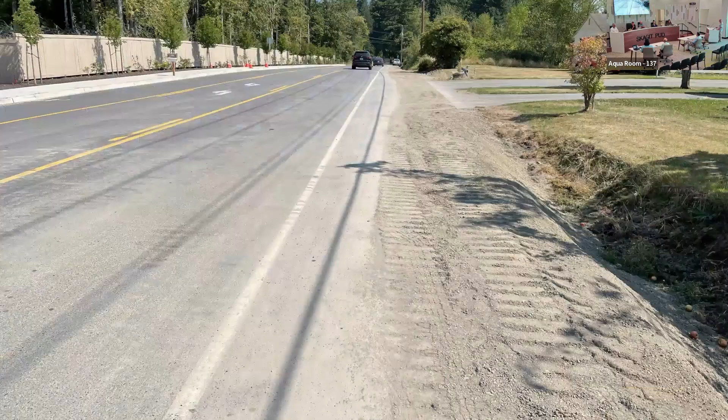So College Way, what's happening? College Way. We've had some challenges with the thickness of the pavement. It was a foot thick or more. We had some utilities in the ground. There was old wood stave pipe, traffic. The contractor really did a good job with that one and wrapped it up just about a month ago.

The Township Road project, this is a crew project. The street is paved, so it was great that we were able to get that in before the city of Sedro-Woolley did their work. The East Division Street project, this is something the crews are working on now. It goes from where we left off our improvements on Mountain View Road to just past the school. That would be from east to west, essentially.

It replaces some old 4-inch AC. There's some restrictions in there. It's really a 12-inch line out on Mountain View Road, and then we have this 4-inch restriction. So we're taking that out. We're renewing the pipe, and we're making the fire flow viable all the way out to the end of the line. And then our last contracted project, again, which we're seeking award for, is the Alta Vista project, and that will round out our...

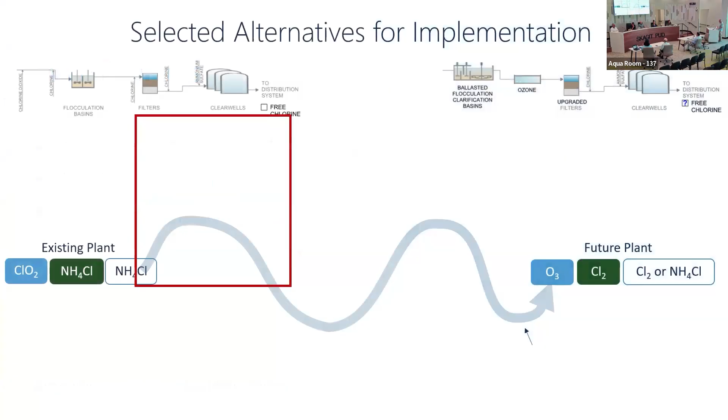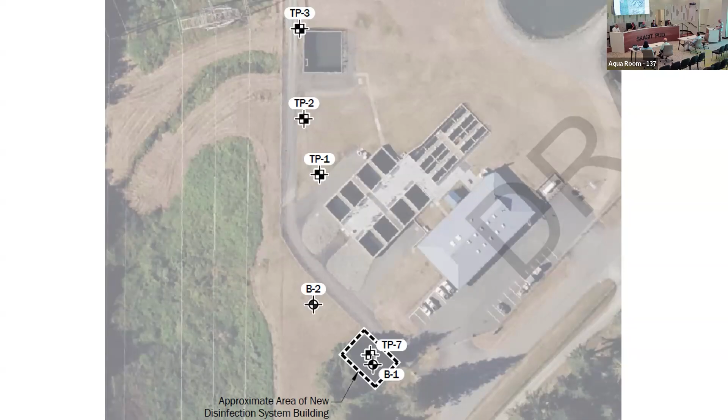Next up, we'll talk about water treatment plant projects. This first water treatment plant project is the disinfection replacement. We went through the alternative analysis earlier. I'm just clicking through this slide. But now we're in the design phase. We've taken some of the concepts that were in the alternative analysis and we're refining them, trying to bring the scope down. We've combined some of the rooms to make the footprint smaller and reduce the size and the cost of the building. And we've also relocated the building to a little bit better spot that's just left of the gate as you enter. This will make delivery of chemicals easier, and it won't have as much impact on future things we want to do up at the water treatment plant.

The W1 pump system, this has been under contract for a while. The contractor's been securing materials. They anticipate starting September 9th on that one. Let's see, the generator project, we're still at 100% design. We just haven't quite pulled the trigger on going out to bid. We do expect to do that by the end of the year. Just with other things going on, it's a lot of additional work to get that out the door. But we do anticipate getting that out by the end of the year.

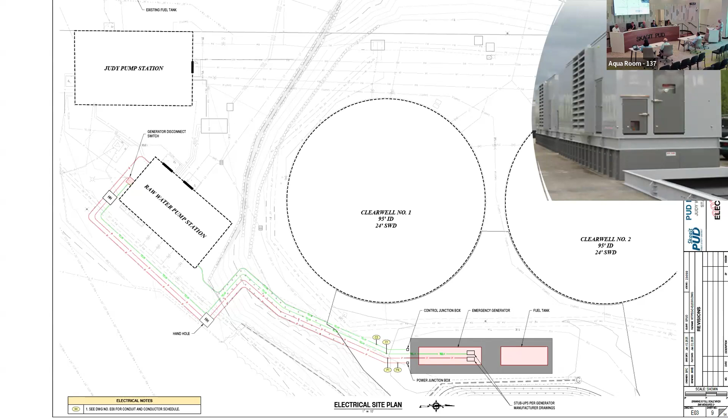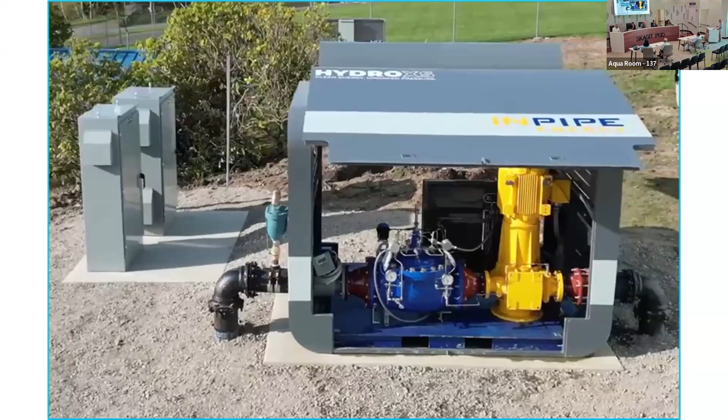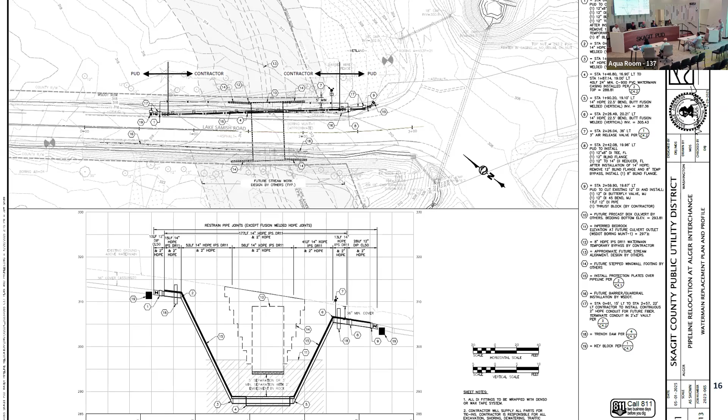Other projects that we've been working on: the micro hydro is up and running. We are working on transferring the meters to the customer, the school district. The Alger project, we went out for bid on this one and it was way too expensive, so we pulled back the bids. We rejected them with your approval here at the commission meeting. And then we've been working with WSDOT to form a utility agreement with them and put the project under their scope of work, and it should be much less expensive. Right now, their design-build contractor is up closer to Bellingham. They expect to be down here at the end of September, so that's probably when we will see this one kick off.

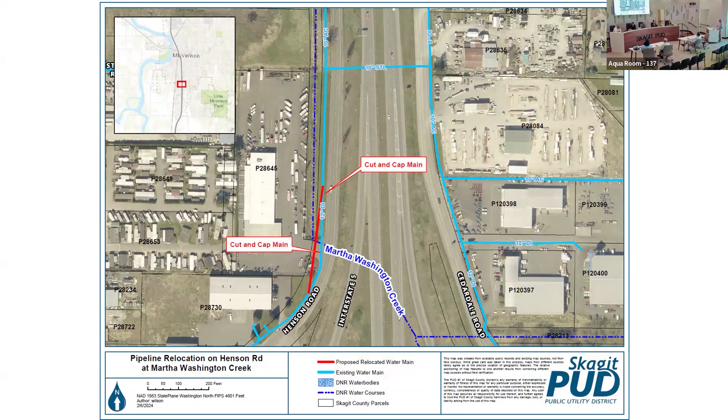Other fish passage projects, the Cedardale Road project. This is the last-minute one that kind of hit us. It's behind Barnhart Crane. It ended up being grant funded as well, so we knocked that one out real quick. Currently, we are finalizing the design and bid package for the Henson Road pipe relocation project. This will be in advance of WSDOT doing a fish passage down here on I-5. We expect to get that one out in the next month.

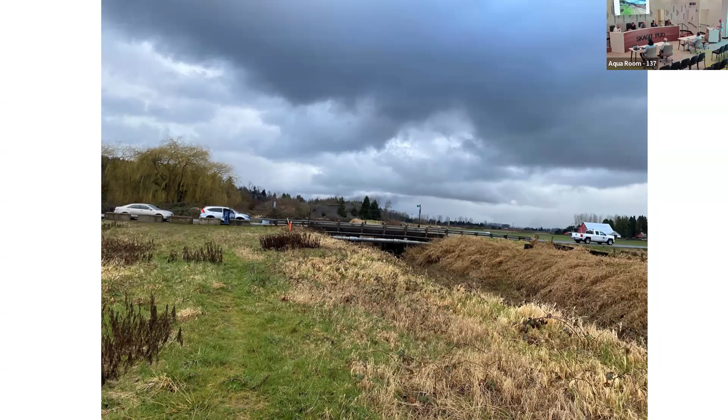This is not a fish passage project, but it does deal with bridges and getting our water across. This is the Thomas Creek project, and we're working with the county on them. Currently, what we're working on is just figuring out how we're going to temporarily bypass this, if we can just put a pipe in the creek or if we need to build a temporary pipe bridge.

Some other things we're working on. This is our fiber optic map. Right now, we're actively in design for the two blue sections. They're kind of hard to pick out. One is on the far left and the other one is in the middle there. This is for going under I-5. We're going to do a directional drill under I-5, kind of at Alder Lane.

And then just west of LaVenture, there's a place where our easement goes straight over the creek. The trail kind of deviates around that. So if we're going to stay in our easement, we got to go underneath the creek. So we're going to go from LaVenture, where we need to go under LaVenture anyway, and we're going to go all the way past the creek and then pop up on the other side.

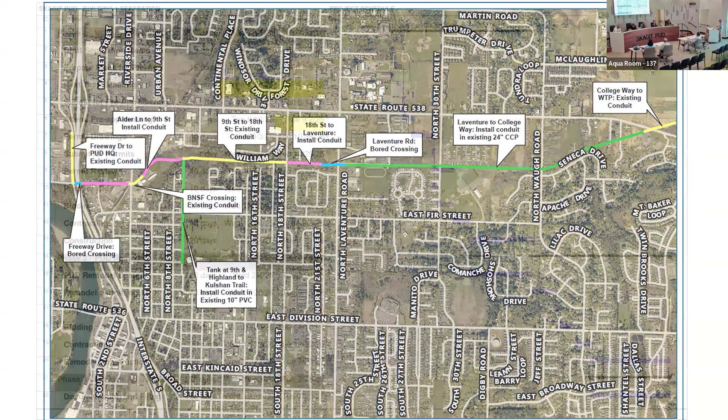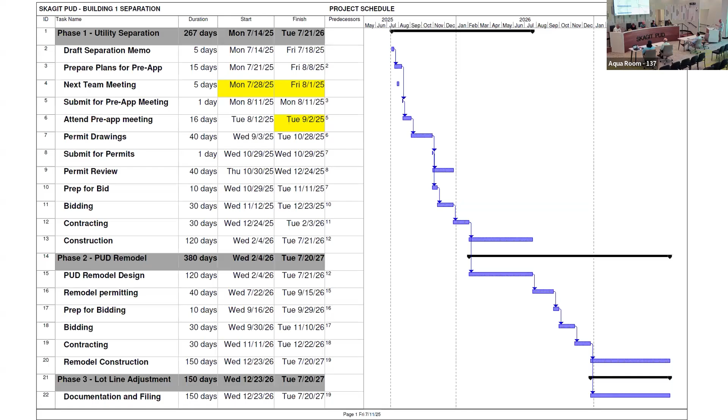Some of engineering's operational activities. We have submitted our water system plan update. Just got a letter today, as a matter of fact, that they would like another 90 days to review our water system plan. So hopefully by November that will be approved.

Water rights, the seasonal transfers have been going very well. The interface with Badger BEACON is great. I've got a shot here. These are 15-minute intervals of one of the meters out there. We haven't had any problems, no regulatory issues. So this has really worked nicely for us, and I think the regulators. Kind of at the tail end of the season. Hopefully Mike will get to turn on the pumps again here soon. But again, I think this has run really smoothly since we've got this going.

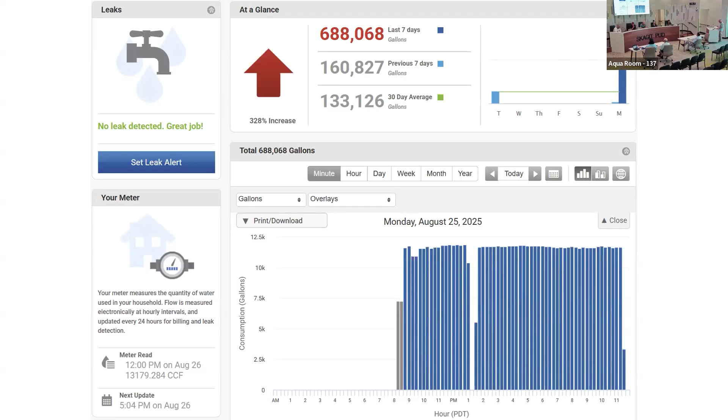Other things, I wanted to talk about the Marblemount transfer, the Marblemount water rights. Maybe about this time a year ago, we were identifying and working with Department of Ecology to take our Marblemount permit to certificate. And Bill's been doing a lot of work with Aspect on this one. Aspect, who is a certified water rights examiner, has reviewed our application. It's been turned into Department of Ecology, and they've accepted the application. So they're going to take a look at it. Most likely this will go to a certificated water right soon.

They've also been working on, we have a number of water rights for the Judy water system. I think there's 14 permits, and we've got 7 certificates, but we have a 3-phase plan to try to get all of those to certificate, move from permit to certificate. And you have to show that water is being used. So it's a little bit of shuffling to say we're using that water right, not this one, to make sure that it can go to certificate. And so they've also submitted for the first phase to bring 3 water rights on, combine those and bring them to certificate. So we're really happy about that.

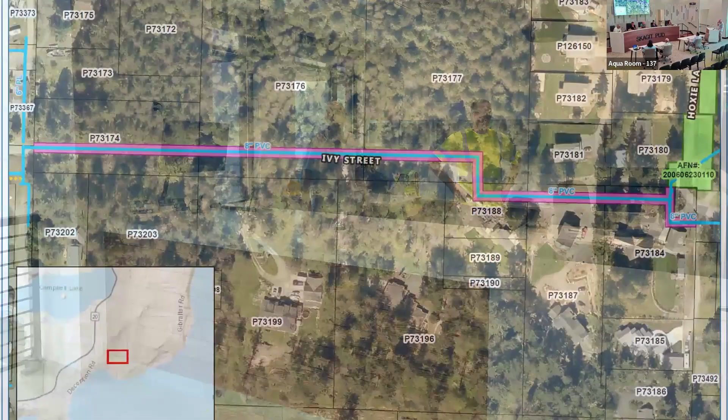Lately, Wendy's been working on securing easements for the Fidalgo water system transfer. We transferred this some time ago. There were some areas where we didn't have easements. This last couple months, she's been making a strong push to get these completed. They're mostly along Ivy Street. There's one on Salmon Beach Road. We've got 3 here that are outstanding, one on Salmon Beach Road that's left. That's out of 28, so we've got 24 of 28 easements that we were able to secure.

Really great job getting those. A bunch of people went out: Mark Semra, Catherine Price, Wendy, Chris Schaff. I think the crews did a little bit of locating, but they walked the street. They walked the road, knocking on doors one by one, and talked to people and secured those easements. So really happy with that effort.

Some other things that are going on: we submitted the ASR. I wanted to talk a little bit about the incentive program. Last year, we spent 42,000 out of the incentive program. This year, it's been a little bit slower. We had a peak year and now it's a little bit slower. We've only spent 7,000 this year. So we're going to keep our eye on that and see if we can make adjustments to that budget.

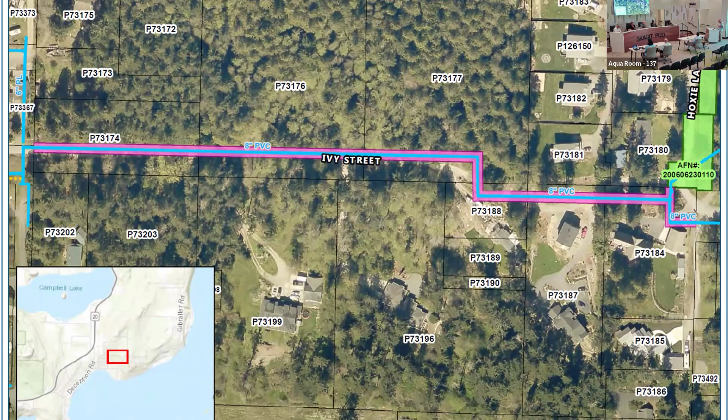Also, our purchasing policy was updated this year. And then we've got our small works roster active and it's doing well. We've got contractors signing up for that. So that's good. We also implemented our drone program this year for surveying and are kind of working out the bugs, but we really see where that's going to be a payoff, not only from a project delivery standpoint, but also just safety, not having our people out in the road doing surveys. And the GIS group and Cort were a very big part of selecting the drone and the software, and they did a good job.

Cort has also been working on some new GIS applications to help out with our pipe selection process, understanding what we've done in the past, where we're going, where we need to go. And he's going to share those with you. And then I'm going to probably hop back on just to go through a little bit of how we're approaching the pipe replacement program in the 2026 budget and beyond.

Thank you, Mark. Good afternoon. Well, okay, so Nick said to Alt Tab. I'm going to go back one step here.

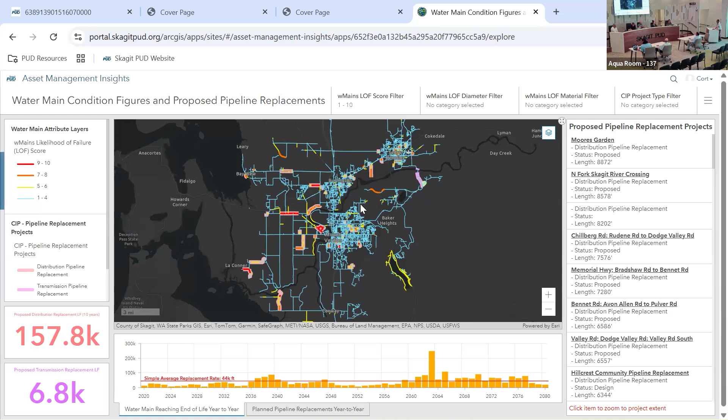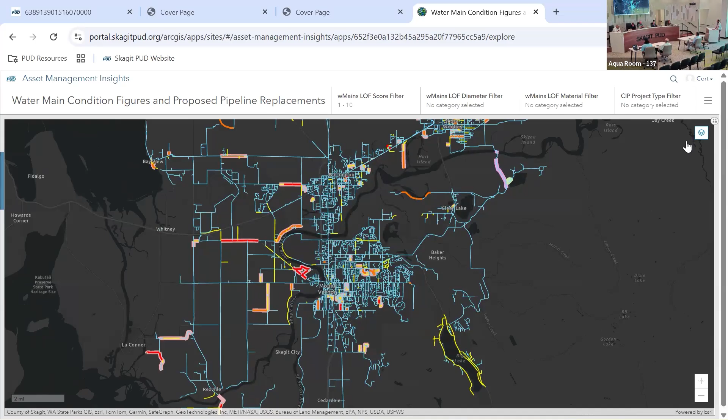So I was just going to do a quick little demo here to show you how it works and what we've been up to. And I'll be doing a more in-depth dive on this at the WPUDA workshop, so if any of you are there, I'll go a little bit more in depth. But what I'll show you here is right at the front, we have this map. This is showing our water distribution system. Let me just clean this up a little bit. We have these different colors here: blue to yellow to orange to red.

Those colors represent likelihood of failure scoring that we've come up with. Right now the scoring is based on the material of the pipe, the year installed, and the leak history on the pipe. There's multipliers on those, and the scoring goes from 1 to 10, 1 being the best, newest condition pipes, 10 being pipes in the worst condition, and we should seriously look at replacement on those.

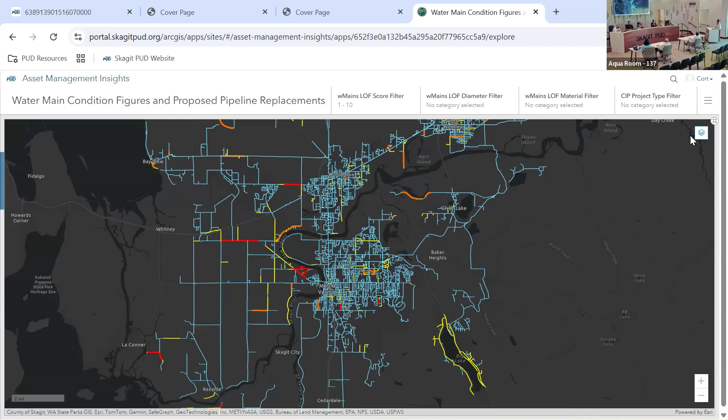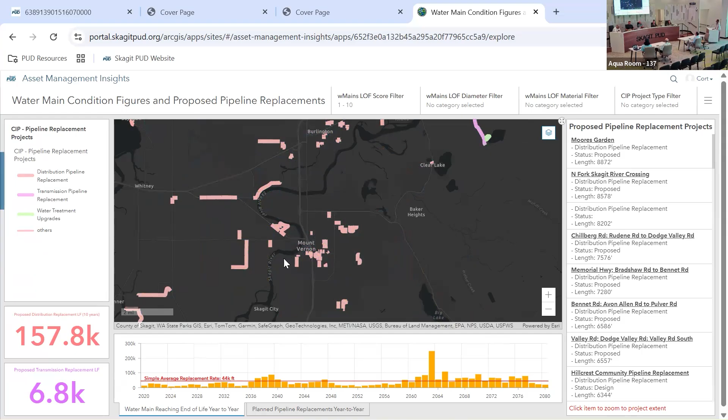So let me just go back here to the dashboard view. And along with that, we have these light pink layers. These all represent areas where we've worked together to select pipeline replacement projects for the next 10 years.

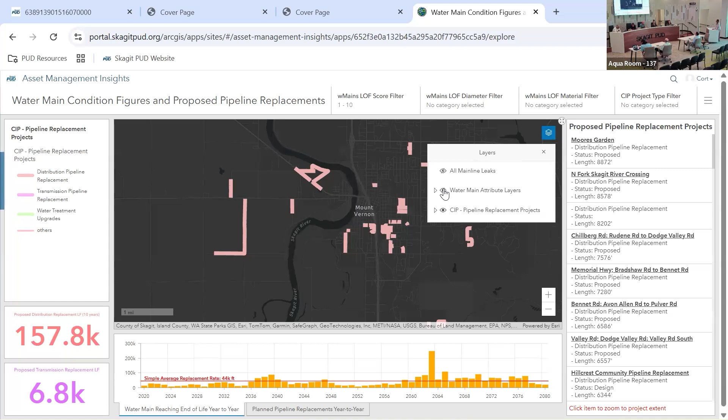And we have a list of these projects along the right as well. This is sort of an interactive list, so if you select one of these, it's going to zoom into the project extents here. This is one example we're calling the Moores Garden replacement project. This is mainly a 4-inch AC pipe in this area. You can see this is red, so this is up high in our likelihood of failure scoring, and you can see that it's also labeled with these group leak count values.

What those represent is, in the background, we use GIS tools to take individual GIS segments and merge them together based on having the same year of install, the same pipe material and historical construction order number, and we consider that a group of pipes. So we total up the leak count on those groups of pipes, and that gives us a total group leak count for a similar aged and material type of pipe.

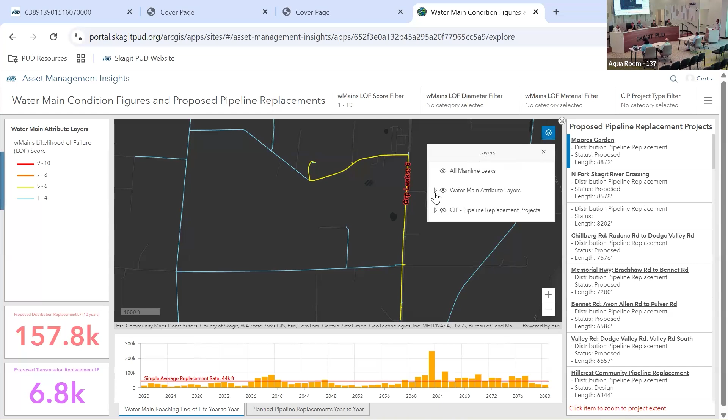Another example I wanted to show is up here. This is on Highway 9. Here this is saying 6 group leaks on this segment of pipe, and it's yellow. So it's not scoring very high, and it's hard to tell what's going on there. So we have a number of other layers that can provide some more insight into what's going on. We have another layer here.

For example, this is showing leak counts on individual segments of pipes. This here is a short segment of ductile iron that's been having a lot of leaks prematurely for its age, from, we think, stray current in this area. So just a little demonstration of some of these layers that we have put together that are really helping to inform our capital improvement planning.

It's really an effort of putting together not only the data that's being collected in the field, but also the work of our field crews who are out there responsible for collecting this leak data in Cityworks, making sure that it's accurate. It gets reviewed by the superintendent. It feeds live into a dashboard like this, where we have integrations in the background that some of the analysts on my team handle, building custom scripts that refresh this data so that we get a very accurate picture of what our pipes are doing right now. And that in turn helps us decide which pipes we're looking at replacing.

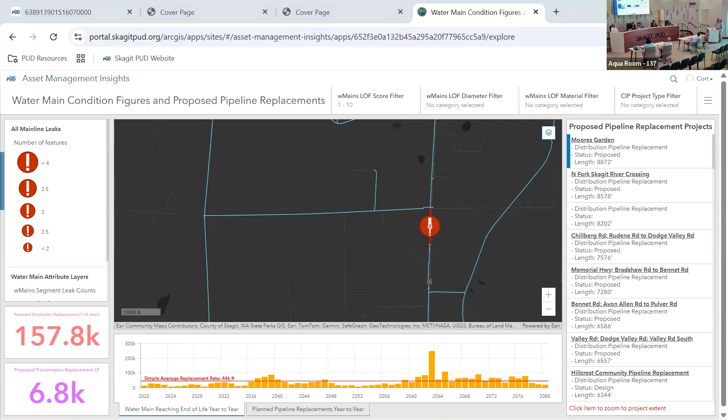One thing I want to say though too is, with the data, we've got all that data in there. It's usable. The way Cort has gone about building this system and bringing in other people from not only the engineering department but operations, the construction crews, everybody, is out there GPSing, contributing to this data, and they trust the data because they know what's in it. And if you've got a system that people don't trust, nobody's going to use it. So just really hats off to Cort for the way he's kind of brought this to the district.

The other tool that he didn't show you, I'm going the wrong way again, that I was hoping he was going to show you is the one on the end, the water main installation history figures. It basically tracks what projects have been installed through developer actions, through pipe replacement, and then further breaks that down by transmission line. I've got a screenshot of it in my concluding little part here.

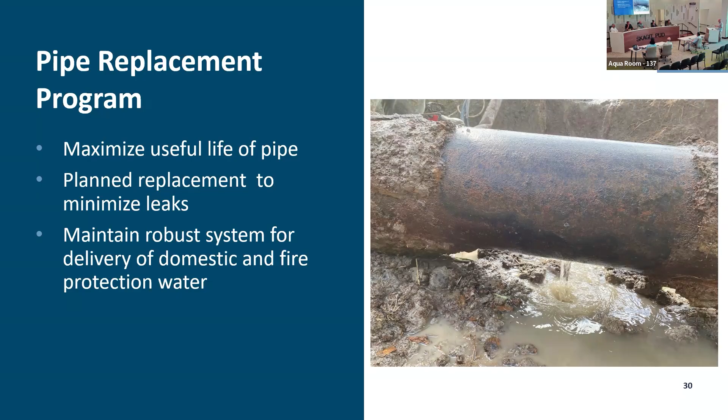So the pipe replacement program, we've talked about this a couple of times this year. We're trying to maximize and select pipes based on biggest bang for the buck using Cort's tools, the GIS application that he's put together. And from what you saw in the pipes that are potentially going to fail, we put together a list of projects.

This is just basically the useful life of each type of pipe. And so when we're figuring this out, we got to look at all these different lengths. How long do they typically last? And we're kind of modifying this as we learn more. And some of the things that we need to start thinking about are the plastic pipes. They don't have a long life, and we've got a lot of them out there.

So that's something that we're going to keep looking at. We don't know what their fail rates are either. What does their fail curve look like? Does it just drop off, like a battery does, or do some of them hang on and some of them not? So we're trying to pay attention to that.

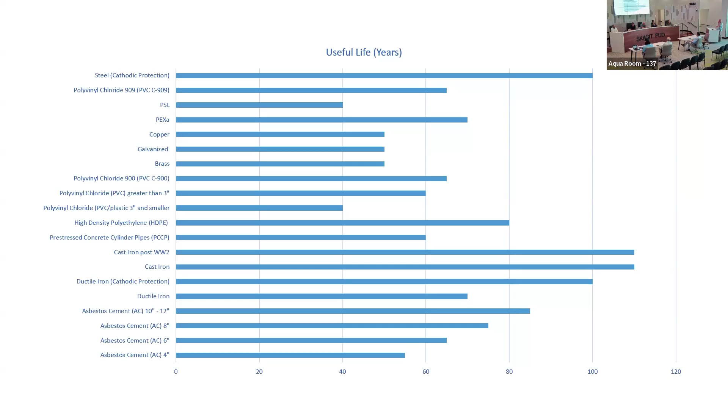So we've been working on a plan to increase our pipe replacement. We've looked at some projects in the budget that maybe we can take out that are more kind of planning level, and we've had them in there for grant funding, and maybe those come out and we take a different look at it. Our current replacement investment is $3 million to $4 million a year on average for our current budget. That's what we've approved from the 2025 budget. 2026 budget, we're going to start moving that up each year.

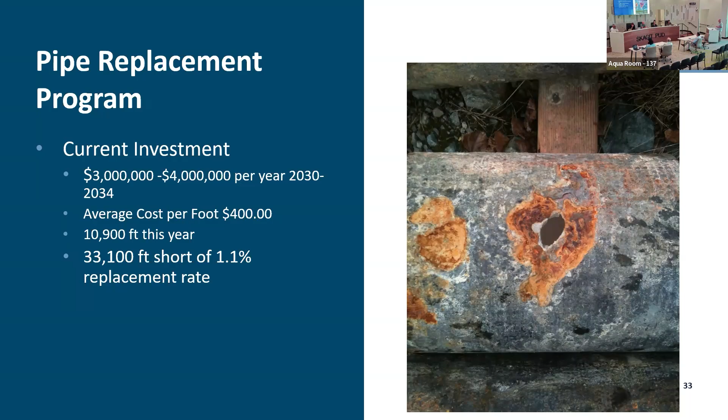We've increased our cost per foot. It's $400 a foot based on inflation and current engineering standards and indexes. This year, we're installing 10,900 feet if we complete the Alta Vista and the Victoria project. So that leaves us about 33,000 short of our straight line average, which is a lot of pipe to replace. Fortunately, that's not coming due for quite a while.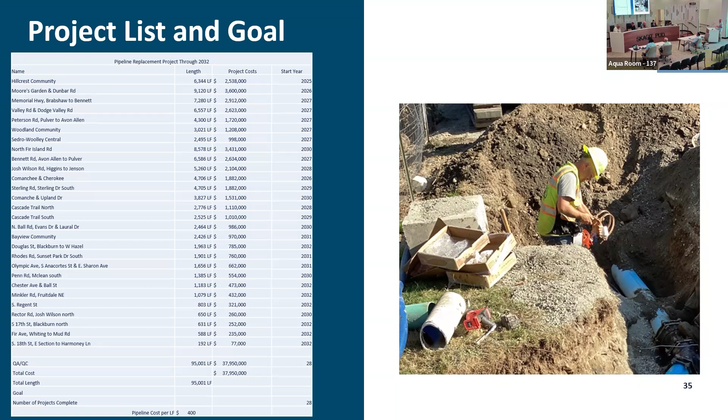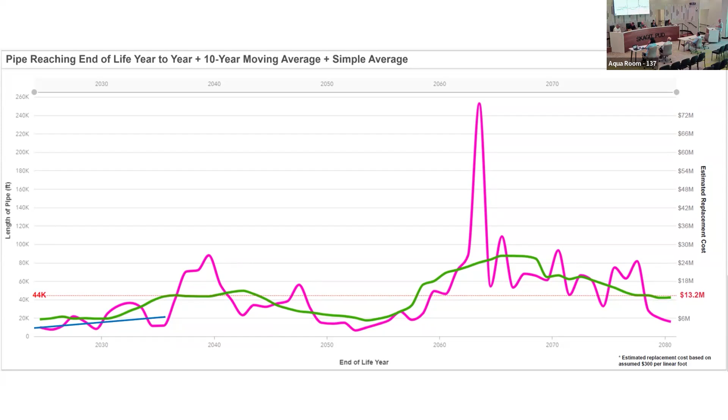But we have this list of projects, we have the financial demand for it, and we're representing that on our budget. What's in our 2026 budget for a 10-year plan is that blue line. It doesn't look like much, but it practically doubles what we are intending on replacing, going from about 10, 11,000 to 20, 22,000 feet over the course of 10 years. It's not going to jump in any one year. We're going to bring it up slowly, add a project and a length, and keep getting our pipe replacement totals going up. We're going to talk about that more during budgeting, and hopefully we can come up with a plan.

Some of the projects that we dropped off that were significant: the Montborne tank, that was a big one. The developers moved forward with their own tank on site. And the other one was the electrical upgrades to the water treatment plant. We don't really anticipate needing those for some time. So that saves a lot of capacity in the budget as well. Are there any questions?

No, very complete summary. All right, well, thank you. Excellent. I feel like we do a lot over the year and sometimes it gets lost, and as we go into budget, I want to make sure you guys know that. Well, and the operational tools that you guys use day-to-day for planning, it's good for us to see and appreciate those too. Being from the industry, I know what goes into them. Getting to see that side going into budgeting makes me feel so comfortable, especially when talking about pipeline replacement. So I appreciate your approach, and I really like seeing the tools you're using day to day. So thank you.

Thank you. Awesome. Mike. Whose dog was that?

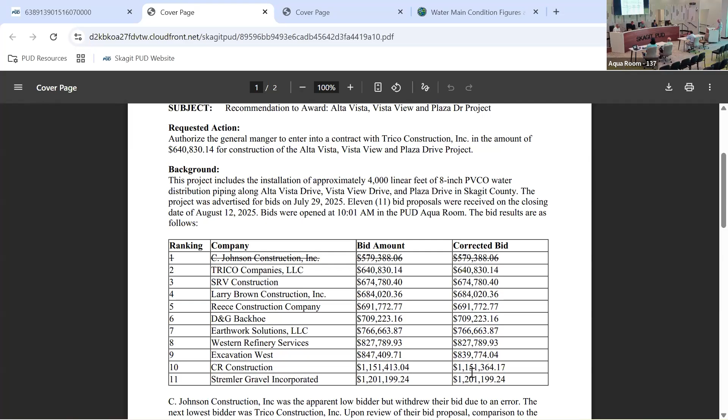Excellent. This might be a chance, Nick, if you could scroll up a little bit to the fiscal impact, just to show how, yeah, there we go. So this is kind of the approach we're going to take at award time for projects. We'll show how much we spent so far, what's in the project budget. And so in this case, there's 1.3 million in the project budget.

The construction contract award is 640,000, but that doesn't include all of our work for tie-ins, inspection, all the admin costs, all those things. So we're estimating cost to complete of 1.25 million. So we're preserving that full project budget until we get closer to the end. And then at acceptance, we can update you and hopefully we come in under. But at this point, we're preserving that budget just to have it for the rest of the duration.

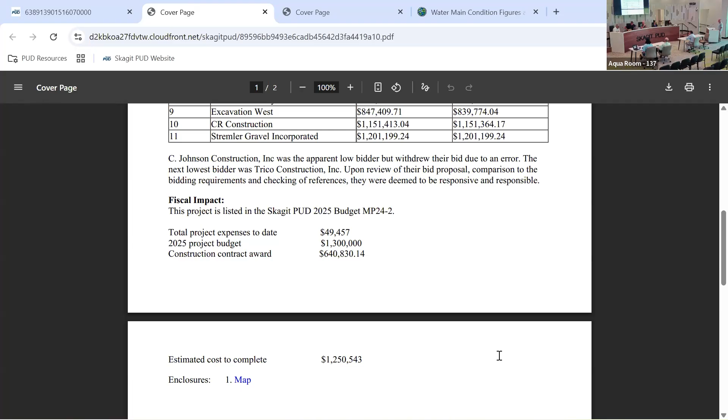Just a quick question. Am I missing, where is the engineering estimate on this? I don't know, I did it. It was around, sorry, it was 850,000. Okay. Sorry, I just didn't see it on the memo. Yeah, is it not shown on here? No, I don't see it on here. Well, then that's a really great bid. We believe you. It was 850,000. Awesome. Excellent. I'll email it to you though. Great. Having 11 bidders, that's great. Any other discussion, questions, comments, concerns?

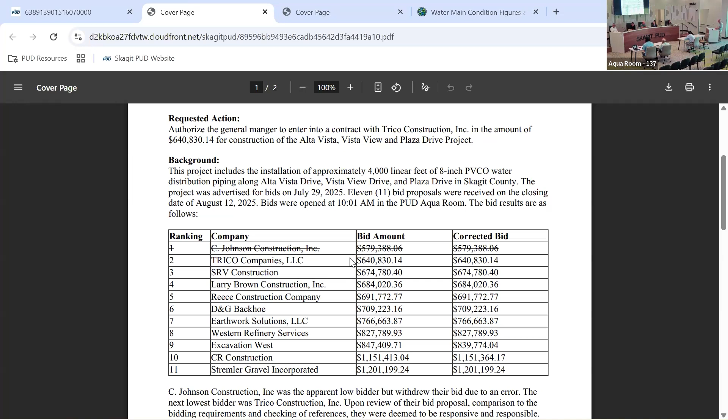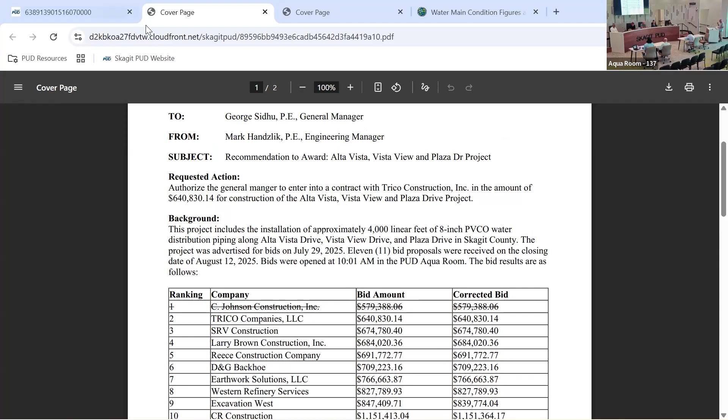I would make a motion to award the bid to Trico Companies in the amount of $640,830.14. I second. We have a motion and a second. All in favor? Aye. Aye. Hearing none opposed, motion carries. Congratulations. Thank you.

All right, and we have a board meeting date change. George, are you gonna? Yeah, this was pointed out when we started looking at our budget schedule. November 11th falls on a Tuesday, and I think it's still worth having that meeting. If things go according to plan, that would be our earliest adoption date for the budget. So if we could, instead of canceling it, move it to the Wednesday, that would be the best.

Excellent. You need a motion for that then? Yes. I would make a motion to approve moving the date from November 11th to November 12th for Veterans Day. I second. A motion and a second. All in favor? Aye. Hearing none opposed, motion carries. Awesome. Thank you. Well, that concludes our business today.

We've got some always great information as to the budget and the reservoir. We like one to be low and one to be high, the reservoir being high, but Mother Nature gets a vote on that, I guess.

Commissioner comments? Just an update from SCOG. They passed a resolution to have the executive director from SCOG serve as facilitator to work on renegotiating the agreement to update the governance for the lead entity for Skagit Watershed Council. So we'll be provided with an update sometime in December. So Kevin will be sticking around tentatively, serving as the person handling the negotiations.